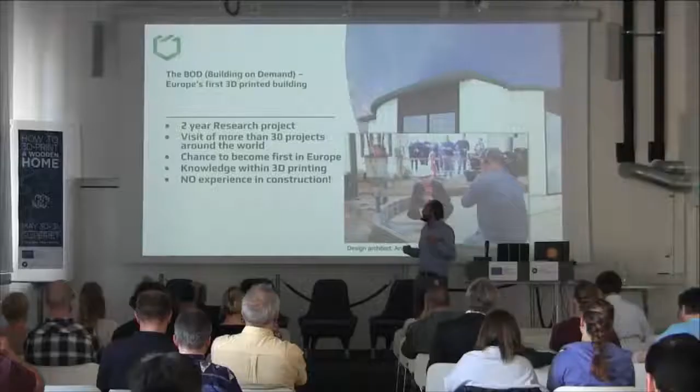So the background of the project: as I told before, we had the 2-year research project that was made along with NCC and 2 other Danish companies. That is the way we went into this field. Then, after a conference we had last year in February in Denmark, we realized that actually no one had built a house in Europe at that point which lived up to European standards.

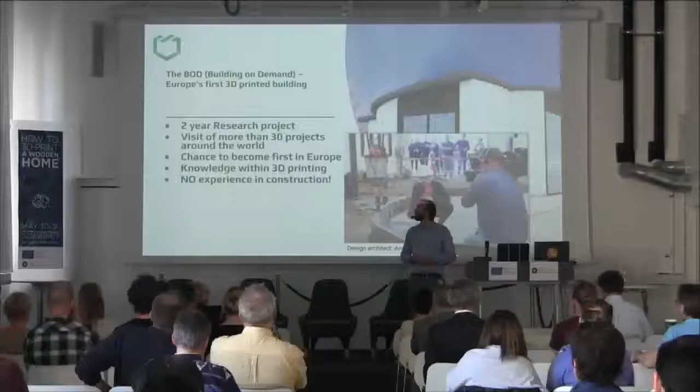So, as a startup company we just thought, let's do it. We had no background in construction and no idea how to build a house, but we thought we could do it. So that was the starting point. That was in March last year.

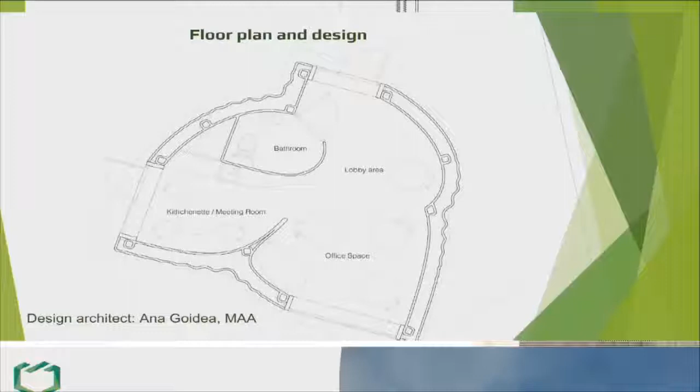And we soon found an architect, Ana Goidea. She actually was here last year and talked about the design phase of the project. She was quite newly graduated from CITA Institute in Copenhagen. She knew a lot about 3D printing, and she was obviously an architect, so we thought that was a good match. And she created this beauty. I think she told a lot about the design process. I'm not very much into that part, but I've been within the construction of it.

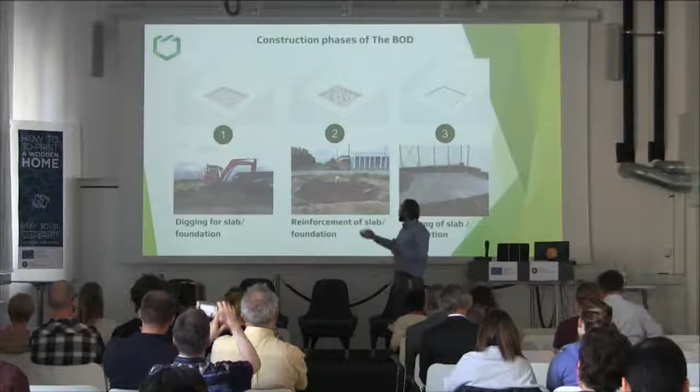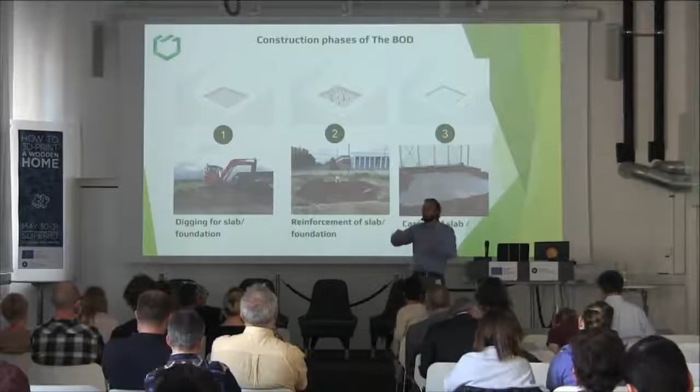So how do we 3D print a house? As I said before, when we 3D print a house, we're actually only talking about a sub part of the house, so the raw walls of the house are what we actually 3D print. So the building process, if you look at the first 3 steps, is completely regular. You'll see some excavating, digging for the slab foundation, some reinforcement, some casting of concrete. Actually, we had a very bad soil in the area, so we had to do piling as well for the house. So all of these parts were done without a 3D printer.

Then we have the erection of the printer on site. So on this plate foundation we built the printer and printed the top foundation. And the reason we had to print on the top of the foundation, this shell you'll see here that's 3D printed, is because this was the first time we met the interface of the normal industry. So we had a very tough time communicating, because obviously the top of the foundation should match

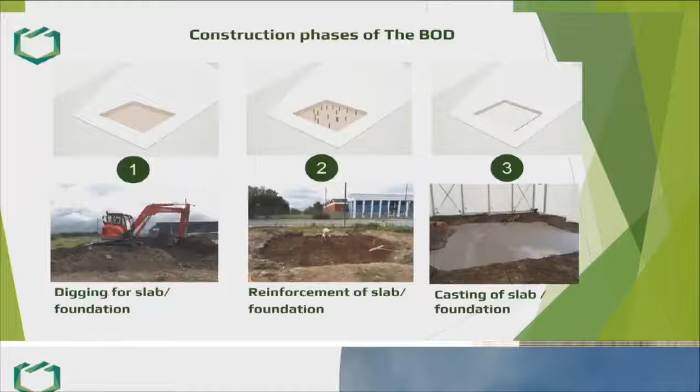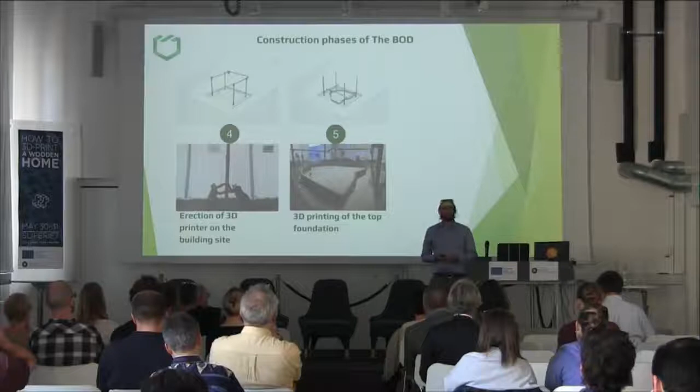the shape of the house. But we had a very difficult time communicating this shape to the normal concrete people, because we said we want this house, so we need the top of the foundation to look like this. And then they're like, we don't know how to do that. And so there we hit the first problem. So we ended up printing this part. It wasn't supposed to be like that, and then afterwards they filled up the printed shell you can see here with insulation. So this is polystyrene insulation.

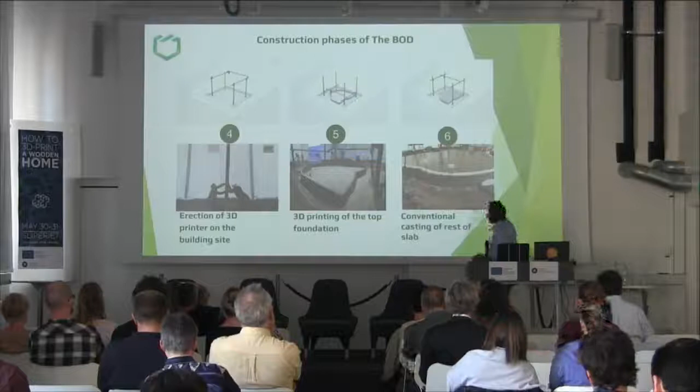They filled it up. You can see these here are the pillars for the columns later to be cast out. You'll see electricity, plumbing, etc. Everything is put into here. So again, we printed this part, and then the conventional industry people came back and filled it out with the normal things. After that was done, we created the house.

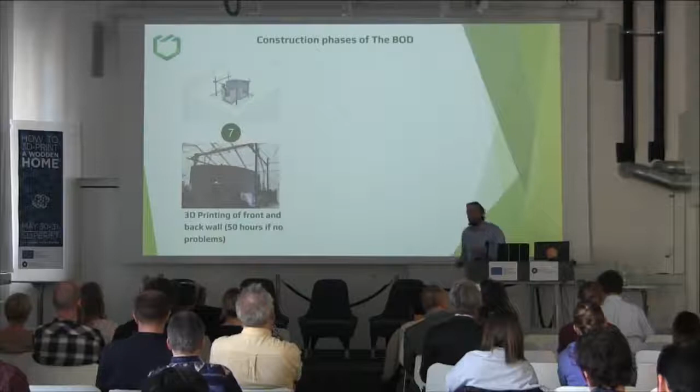So that means we printed the outer and the inner wall with the printer. And as I write here, it's 50 hours, 55 hours of printing time. But they were spread over a month and a half, because we had quite a few issues. I'll come back to those later.

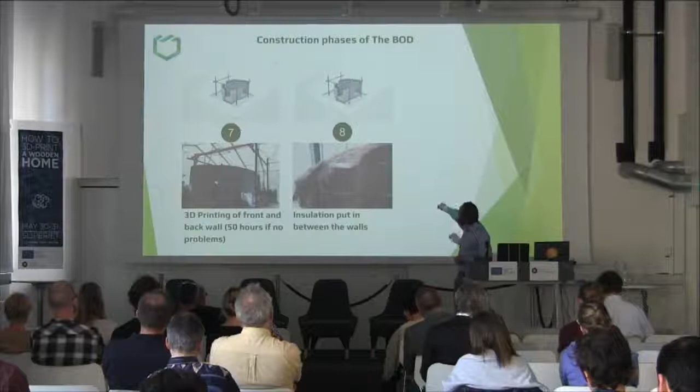Afterwards, we filled out... you can see here the inner wall, the outer wall here. This is a column. So we cast out the columns here with concrete and reinforced steel. Then we filled out the space here with insulation. This is paper granulate insulation. Then the roof is made as a wooden construction here, and windows and doors are inserted.

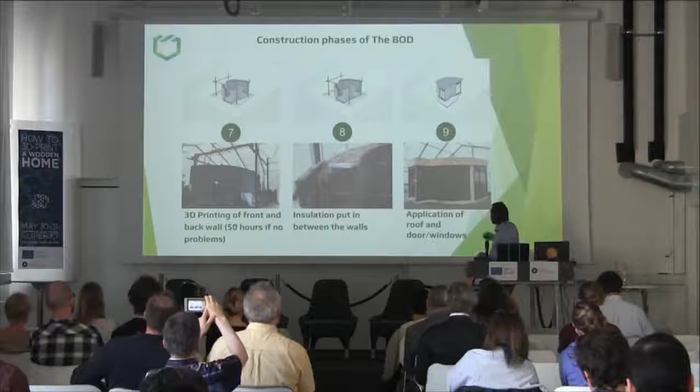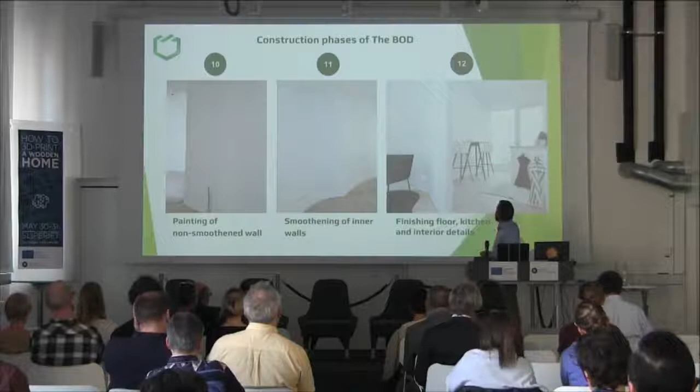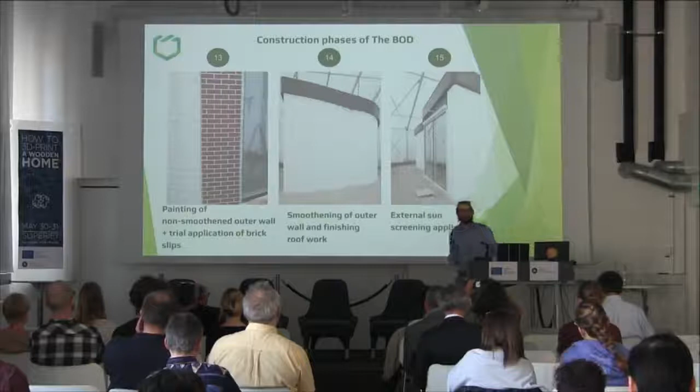And we have painted the walls, put in flooring, smoothed the walls and so on in some of the places, and put in furniture, etc. And from the outside you can see the coating, painting, like everything is finished. And at some points we have added a trial application of bricks because it's an experimental project, so we want to just have a go.

Can we put brick on top? It's these thin shell bricks, stuff like that, because we want to be able to see what is actually a viable way of 3D printing houses. What makes sense also from a business perspective, because obviously we are a business, so we also need to make money and we need to survive into the future.

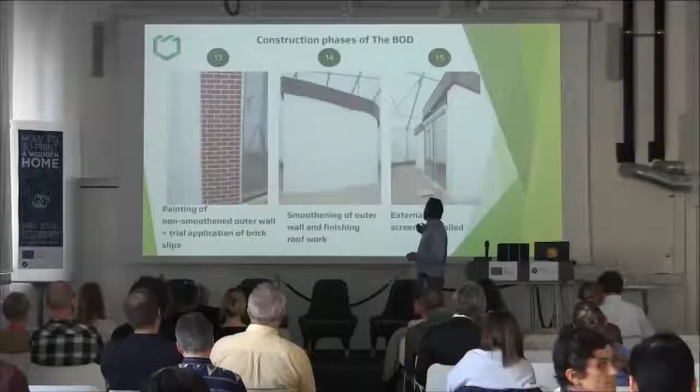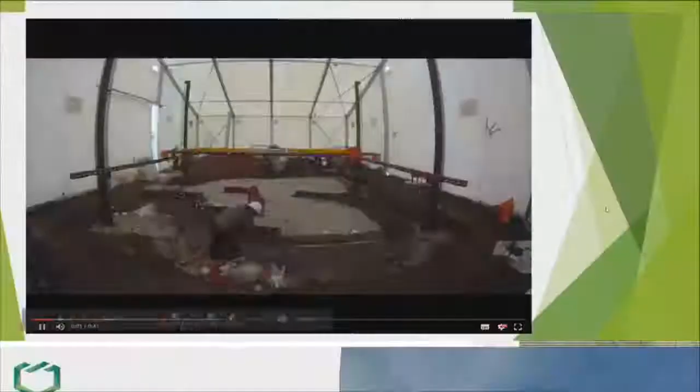So yeah, and hopefully this will begin soon. Maybe. The video. Maybe I have to push. Here we go. So here you can actually see the process going on. So maybe I'll just pause it. Maybe I won't. Oh, shit. Here. All right.

So if we look at this image here, as you can see, we print layer by layer, roughly 20 millimeter layers of concrete, 50 millimeters wide, both the inner and outer wall. And as you can see here, we have all the columns. So what we print is actually just a hollow space for the columns to later be cast out. In the bottom, we had reinforcement steel going all the way down to the foundation. And after we are done, we put in further steel up to the top and cast out.

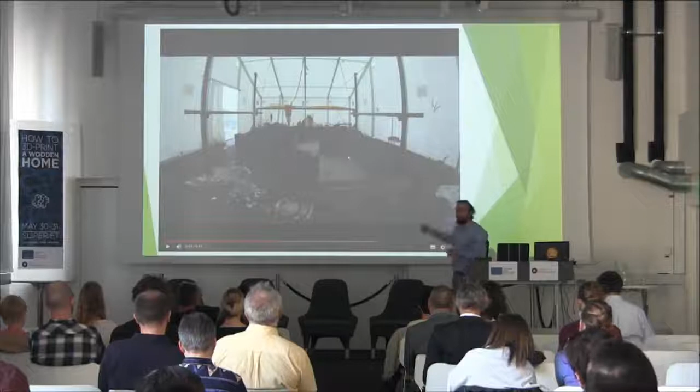You can see in the back here, that's actually me, mixing materials batch by batch. I'll be back on that later, but everything apart from the printing was very manual. And as I said, we are completely new to construction, so there's a lot of these things that we had never done before. So we just did what we thought was the most efficient way to do it.

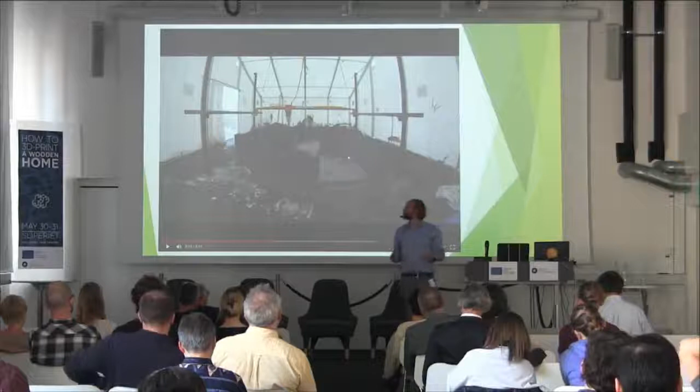It probably wasn't. But in the back here, you'll see a lot of material, and you'll see a guy over here who's actually sieving all that material, because during the process, when we were like 2 meters up into the house, there was this. You can actually see some of the traces of the explosion here. This hose here exploded because we had some large rocks in the mixture. We ordered the mixture to be a maximum of 8 millimeter stones. We knew we could handle that with all our gear and pumps and so on.

But by some error, I don't really know where it happened, we had these 20, 30 millimeter stones. So they came into the pumps and into the hoses and clogged the whole thing, and stuff exploded. But obviously that explosion delayed the project by 3 weeks, because then we had to go back, fix everything, get a new pump, get a new extruder, get a new hose.

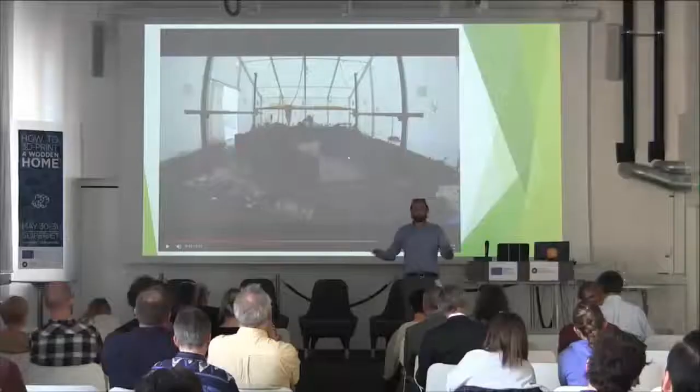Then we had to find some mechanism which could sieve all that material, because we had like 15 tons of material here. We couldn't get it out of the tent because we didn't have the room to put in a truck. So we had to sieve it in place and hire a guy to just sieve material from morning to evening for the rest of the project. So yeah, that was one of the learning points here.

Over here, we have Michael, my colleague, it's a bit hard to see, he has two computers. One is controlling the machine. The other one is connected to some cameras mounted on top of the extruder here. So at every point of the process he can actually see what is going on directly where we are printing, and then adjust accordingly. Because it was the first time we did this, and because we mixed it manually, there were small variations in material all the time.

So it meant that, for instance, the wall would be a bit more rough in one place, or suddenly there was high moisture in the environment, and the concrete became a bit softer, and it flowed faster out of the nozzle. So we got these hanging things, and he needed to adjust for that right away in the machine.

So for this process, he was there all the time, pushing 2 buttons, like extrude a little bit more, a little bit less, a little bit more, a little bit less, for the entire day. So as you can see here, 3 people working full time to have a machine 3D printing a house.

Not very efficient, and that's also going back to the point from before that we are not really world champions in this industry yet, and nobody is, because if you look at all the videos from all the others, you have like 10 guys around a 3D printer doing a house. And that's all right, because all these 10 guys need to learn something in order for it to be better and improve on the technology in the future. But let's see if we can continue this.

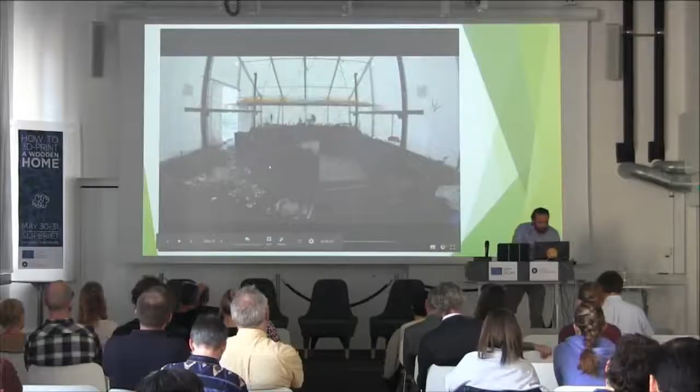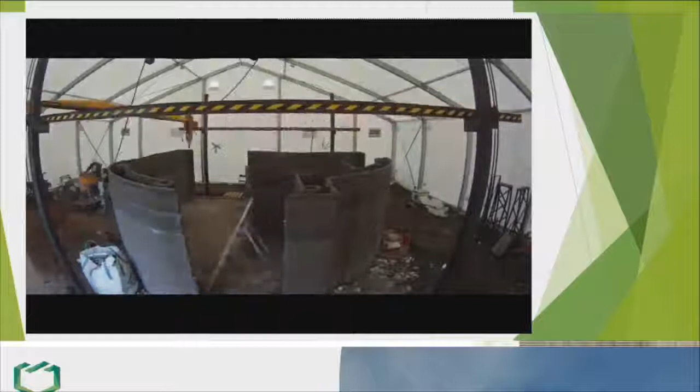All right. Yeah, so we continued. You can see it's night and day, night and day, night and day, and at some point the camera can't really see, so we shift the angle. Actually, here you can see a little bit better over there. The mixing station, the pump goes through, and here. Scaffold going around, because we had to put in wall ties all around in order for the walls not to topple over. And actually, if we go a little bit back here, it's actually good to see.

You can see here, these splits here, roughly, are what we could print in one day. So this is roughly 50 centimeters on a good day. That's 50 centimeters of the entire house, but that's 50 centimeters in roughly 8 hours of printing. So you can see there's some hours in this project. Obviously, the machine will be faster, and we can do it faster in the future. But this is the reality right now. This is how we did it.

No. Can we move beyond this?

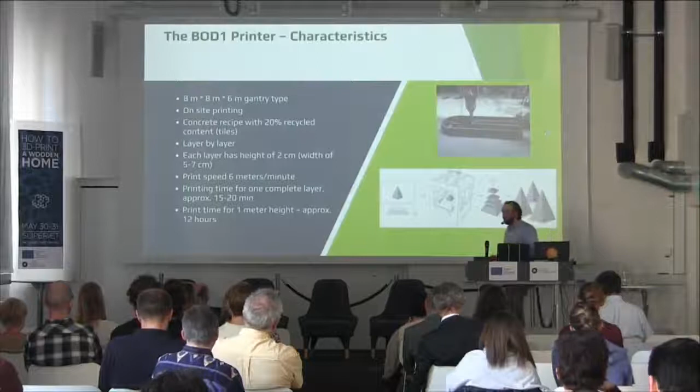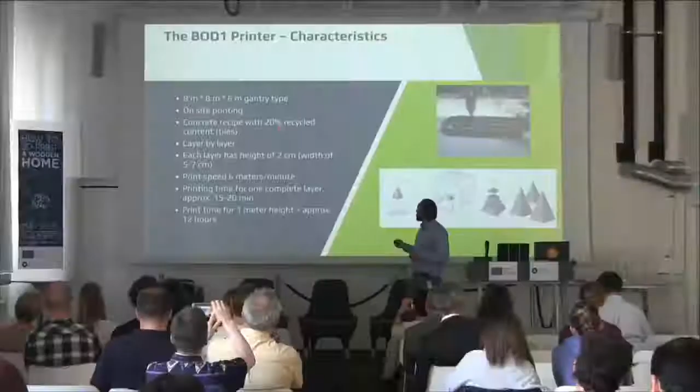Yeah. All right. A little bit about the machine itself. It's a gantry printer, so as you can see, 4 legs, very simple. 8 by 8 by 6 meters on site. We had 20% of recycled materials in the mixture, tiles that were crushed down. It was actually because the initial project was funded by a Danish grøn omstillingsfond. I don't know what it's called in English, but it's like a green sustainable fund, so we were very focused on what we could do with recycled materials in this mixture.

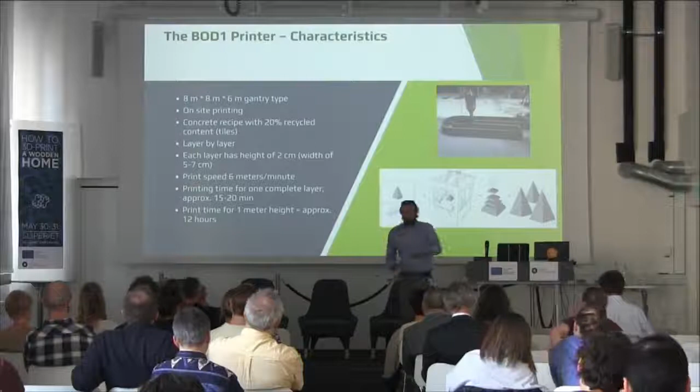That added a lot of issues, but it was a good experience, layer by layer. Roughly printing 6 meters per minute in the vertical direction. We believe soon we can print like 18 meters per minute, and then 50 meters per minute, and so on. So that will increase really fast. So we had a layer time of roughly 15 to 20 minutes, depending on the moisture in the air and the temperature and so on.

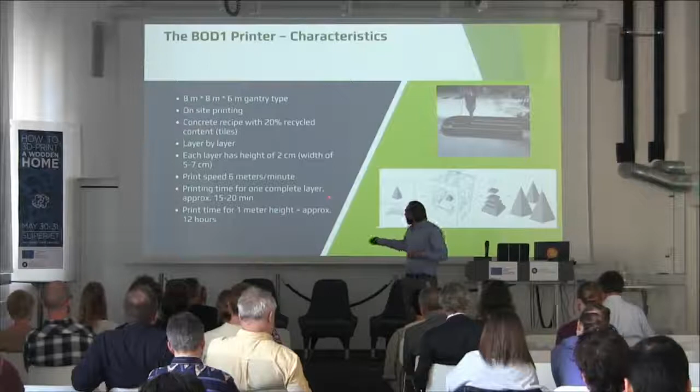So this time here actually becomes very important later for development, because when you look at the building and the material, you need to design your material for the time. Imagine that you have wet concrete, and then, 15 minutes hopefully after that, you put on another layer of wet concrete. Then that layer needs to be hard enough to hold its shape and its height, but wet and soft enough to fuse completely together with the next layer added on top. So you have a small sweet spot of a window, and that depends on material, environment, printing speed, geometry, how your printer moves, vibration, a lot of things.

So this exact material recipe was perfect for this exact house with this exact printer. It's not sure you can take it and build anything else with this exact recipe, but it was really good for this project. Yeah, so 1 meter is roughly 12 hours if you print continuously without errors.

Yeah, so what did we learn from this? A lot, obviously, and there's a lot to learn still. We know that we haven't really scratched the surface of what we can do, and we really want to improve. That's also what I said in the beginning, that we really want to be open. Right now, I can tell you everything, every minor error we had, every software error, every hardware error, and where it happened and why it happened, or why we think it happened if we haven't tested it thoroughly yet. Because we want to learn. We think this technology is still very, very new. We want to get feedback.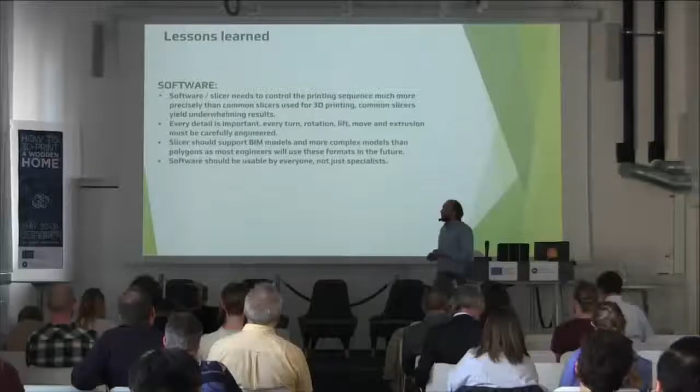But also, if we look to the future, we know that BIM software, or BIM-like software, Rhino or something like that, will create most of the houses. So we need to be able to interpret that in a smarter way than we are doing now. So instead of polygon models that you usually use for 3D printing, we are using BIM input, so we can take a Revit input and put it directly into the printer and interpret it that way. Right now it's worse, but we believe in the future we need to do that in order to move into the industry.

And obviously, software needs to be easy and usable for everyone. Right now, it's a lot of lines of code that only Michael can use. So at some point, we will need to make interfaces for other people to use.

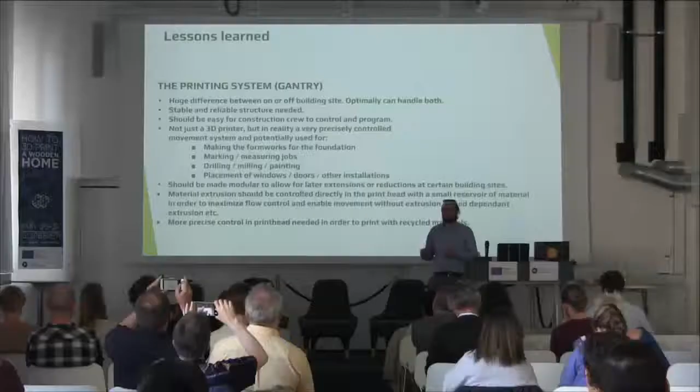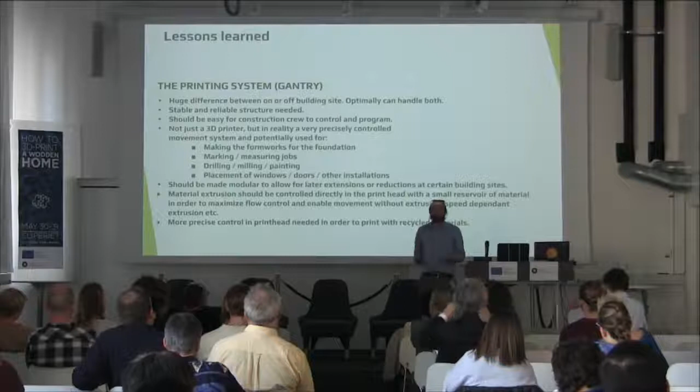Printing system. There's really a lot of difference between on-site and off-site printing. As I mentioned before, the environment, the temperature: if it rained the day before, we had all the material placed on the ground, so a lot of moisture would draw up into the material. So if it was raining the day before and we printed, we would need to adjust the mixture day by day. So we might add 200 milliliters less water to the batch, because otherwise it wouldn't work at all. So we are really vulnerable to the environment.

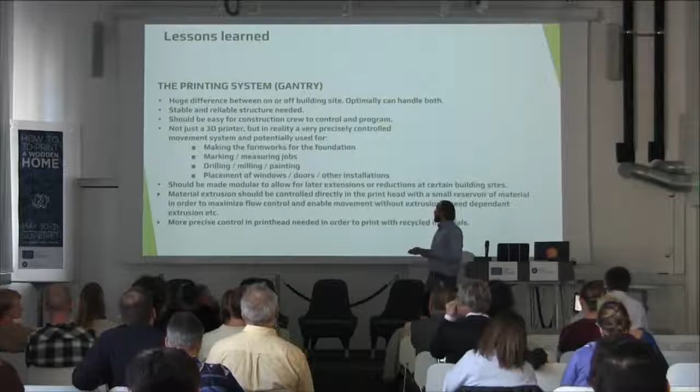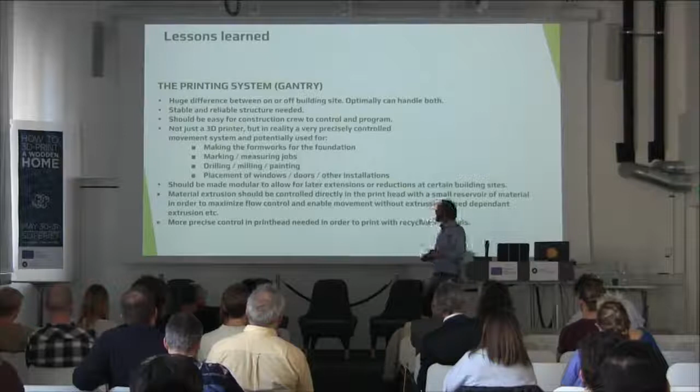We really needed a stable structure, because as soon as it moves or vibrates, we could actually topple down walls. But what we figured out was a little bit by mistake, because at some point Michael sent the wrong code to the printer, so instead of moving up, it moved down. Unfortunately, it moved down into what we'd already printed the day before, which resulted in a 10-ton press on one point of the wall. Fortunately, nothing happened, but a nozzle broke; we printed a new one, so it wasn't a problem.

But then we figured out that we can actually use that in the future. We can take this and just install a measurement system.

So after we have printed and let it dry, we could actually go down and, for every 20 centimeters of the wall, check the strength of the wall after we've printed it. So a lot of those thoughts came because of weird errors that happened during the print.

Then we started thinking about what else we can actually put on here, and instead of thinking of the machine as a 3D printer, we started seeing it as just a positioning system, a very precise positioning system that you have on the building site. And then you can start adding: a printhead is one function, then you can have a painting gun, or you can have insulation, and you can just slowly start adding features to this movement system that you have.

And then we went back and said, okay, the movement system could actually be anything as well. It could be a robot arm, a gantry, a crane, or a small robot. It has very many variations. So like this gantry printer you see, it might not look like that in 2, 3 or 4 years, but it's just how it looks now because of coincidence, because that's the printer we know and know how to control right now.

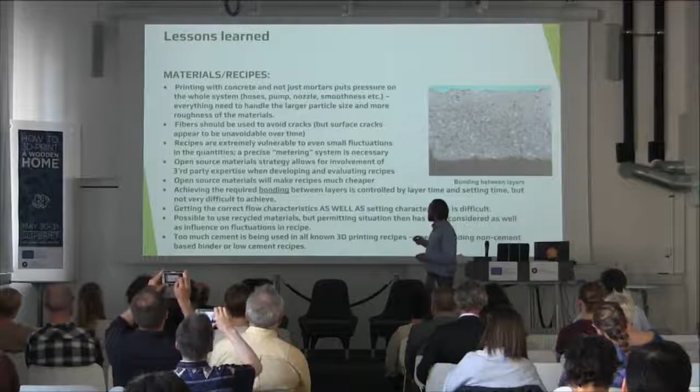It should also be modular, because obviously not all houses are the same. Most houses are different and in different conditions. And we need a lot more precise control of everything that happens, in the material and so on. If you look at the material specifically, if some of you want to experiment, I think it's on our website somewhere, or I can give it to you. It is based on cement, sand, gravel, crushed tiles, polypropylene fibers, and a bit of plasticizer to make it more fluid through the pump system.

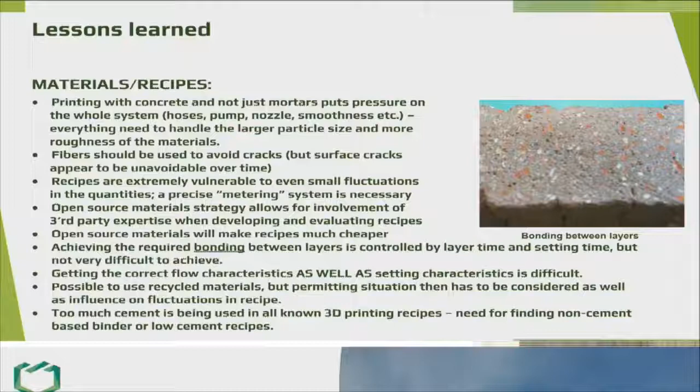But the difference between what we did and what we see around is that we actually put in gravel and large grains, because most recipes we see around are just really fine mortars. But if you look both at the price and at the strength performance, at some point you want stones in your concrete, because it adds a lot of strength and makes it much cheaper in the long run. Fibers are at this point necessary; I'm not sure in the future. It was the only solution we could get to avoid setting cracks.

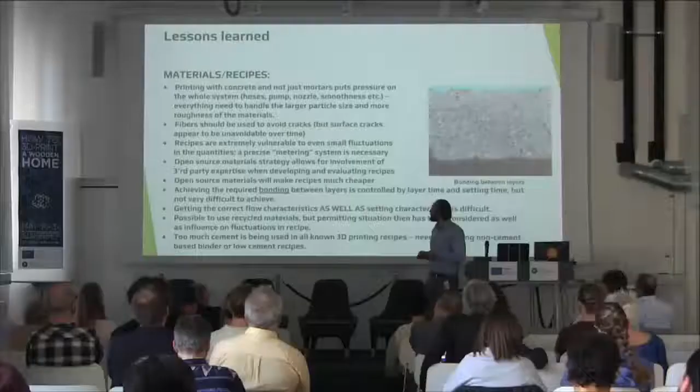And then again, recipes are really vulnerable to small fluctuations in moisture, in water, as little as 20 to 50 milliliters of difference in water. It could mean a really good print or a really bad print. So there's obviously a lot of issues there. So we think open source materials definitely are our way to go for the future, because we don't want to be material experts. We want others to contribute with their knowledge as well, because again, we are not construction people. We are technology people.

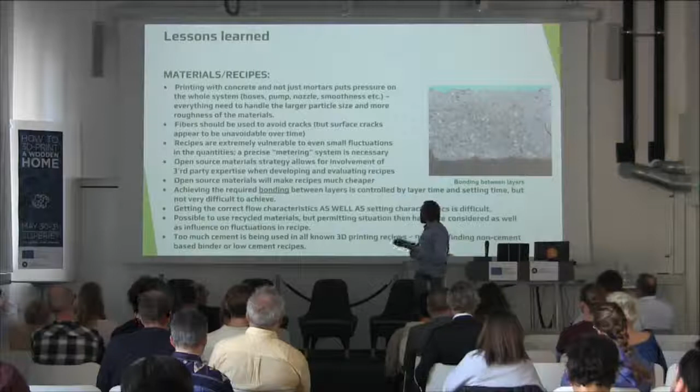It's actually quite easy to get bonding between layers, but it's controlled by layer time and setting time and so on. Flow characteristics are really difficult to get straight, especially when you're out in an environment that changes. I think it's easier inside a construction hall. And if we look at all the recipes out there, as well as our own, there's a lot of cement being used. The percentage of cement is 15–20% higher than normal concrete you cast out there.

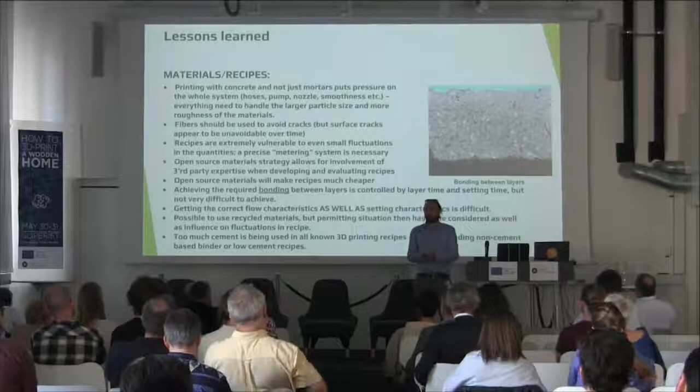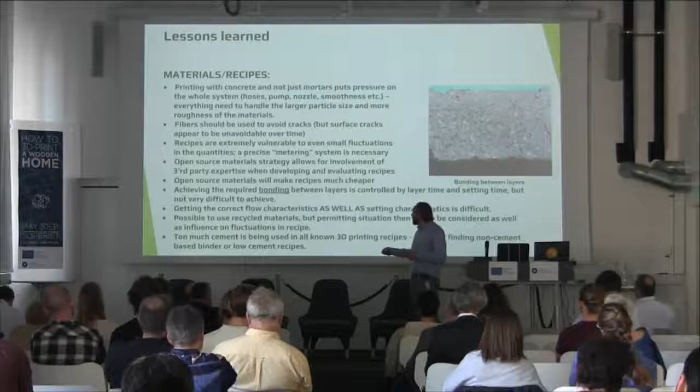Which means for the environment, even though we put in 20% recycled materials and actually used less material in weight than you normally would, the high amount of cement is making it less environmentally friendly, because cement is a big sinner in concrete. It needs a lot of heat to produce and so on. So there's definitely way too much cement in this material.

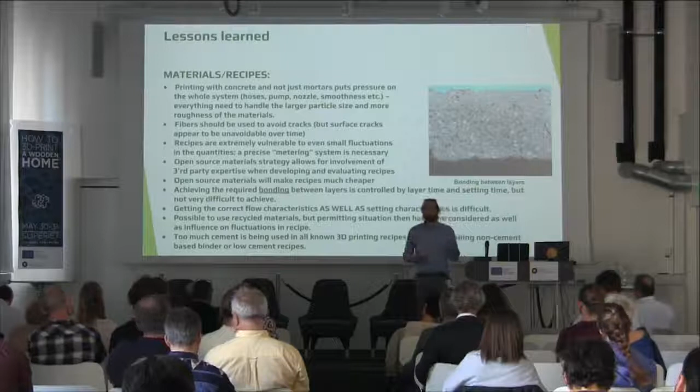So we need to find either a non-cement binder to use, which is why I think this wood project here is really exciting, or find other recipes that have a lower content of cement, where we can control the fluidity in another way. And we hope that some of the material guys out there will help us do that.

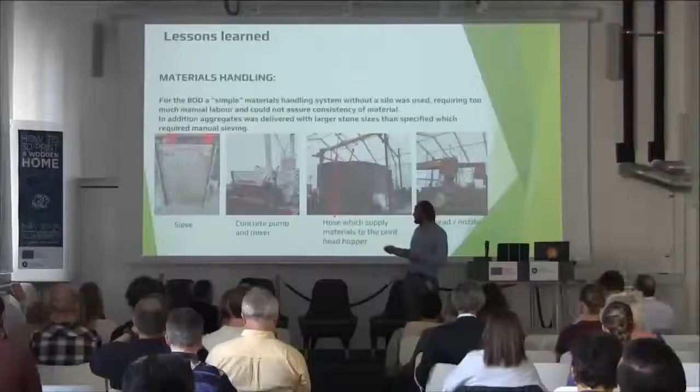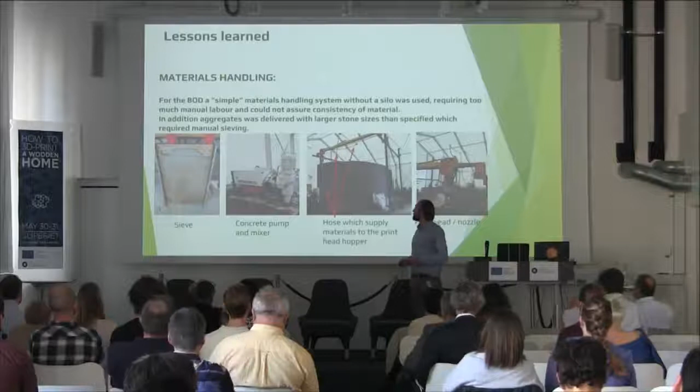And the material, oh, like this. The material handling system for this project was quite simple. As you can see, the sieve, that was the one we made to avoid all these big stones. Very basic mechanical thing, but required one man full time to do it. Obviously, we won't need it for the next project. I think we've learned how to control our material now.

Concrete pump and mixer. We actually ended up detaching this part and only using the pump and another mixer, but that's a different story. Hose to supply the material, so you can see up here, just mounted in some wheels in the roof. We have the hose where we pump the material out to the printhead, and we have the pump here, or this part of the pump here.

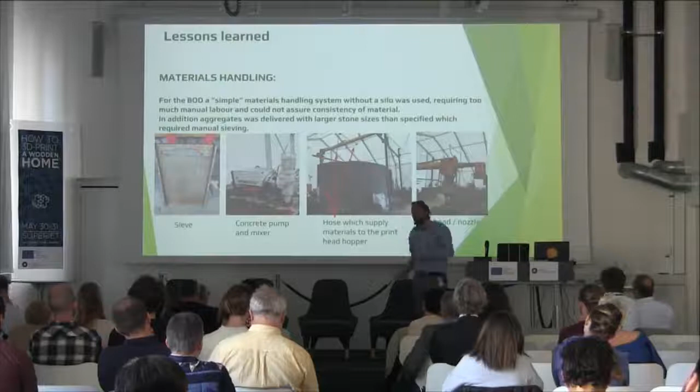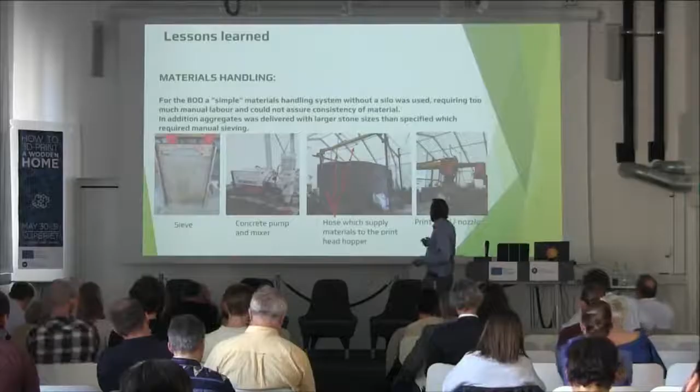This was controlled just by a switch by Michael, so he was looking at the camera that looked down into the reservoir up here. So every time he's like, okay, we need material, he turned it on. And then when it's full, he turned it off. Obviously, that should be automated as well. So all this material handling system should be automated. There's several ways to do it.

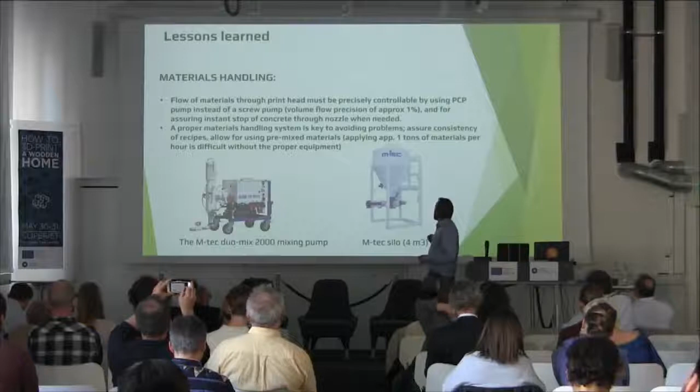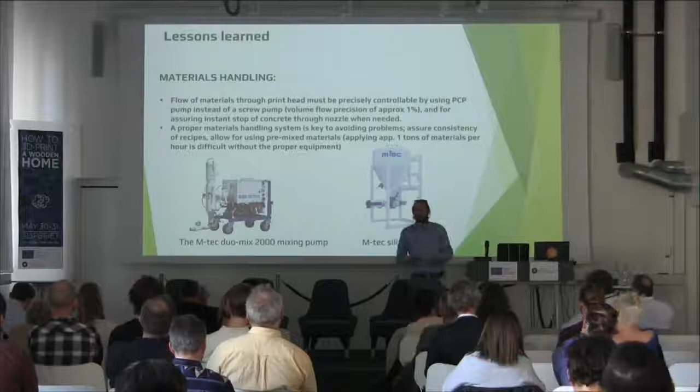If you go with dry, completely dry, pre-mixed mixtures, you can do it with silos like this, and continuous mixers. The only thing is that it's very difficult to get recycled materials into these types of mixtures, because as we'll come to, no, that will be later, sorry. None of the concretes with recycled materials is yet standardized, so you won't find a standard for recycled materials in concrete, which is a huge problem if you want to use them, obviously. Hopefully there's something in the future there.

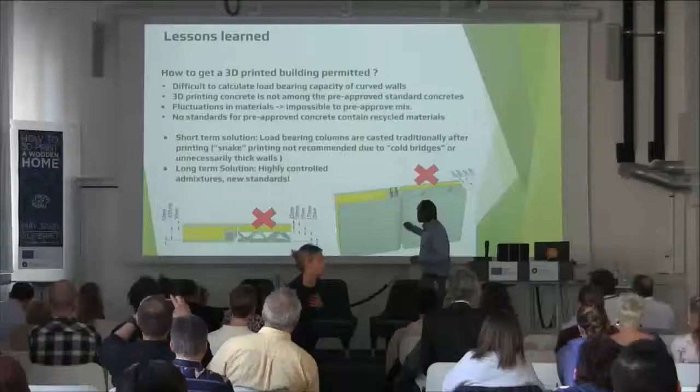And then, how did we get it permitted? Actually, it wasn't that difficult. So what you need for permission in Denmark, I don't know if it's the same in Sweden, is you need an engineering company to sign off. You need their insurance to be convinced that it's actually doable. And then you need, obviously, to have the kommune, the city council, approve. And then after it's done, they will send a representative, and they will do some measurements in terms of vibrations and so on. And if you pass all those tests, you have a permission and you can use it.

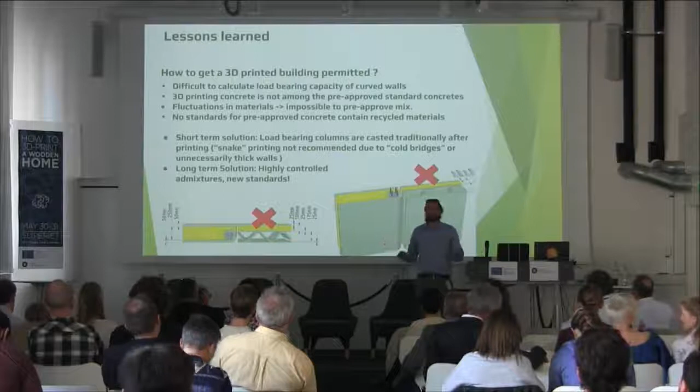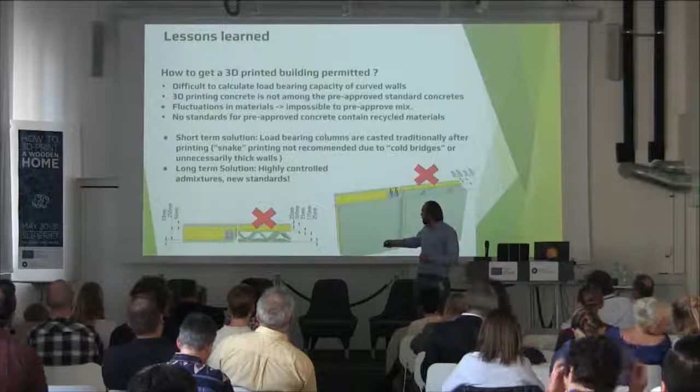We haven't done the last test, but we are quite sure we get it because we have the building, we have the site for 10 years, so we really want to rent it out to not lose a lot more money on this project. And that's obviously the short-term solution. As I mentioned before, the only way we could actually get a permission was to have a static system that was conventional. So that's why we did these columns.

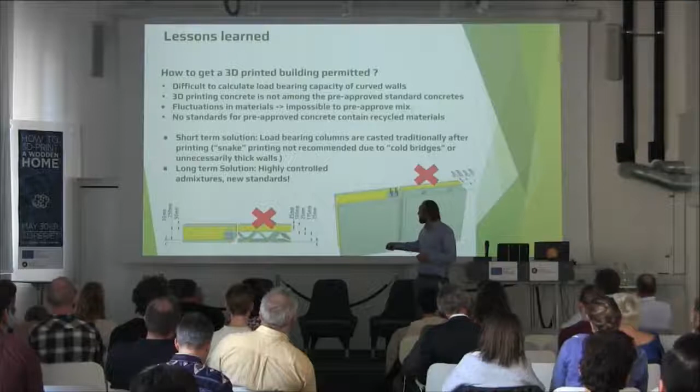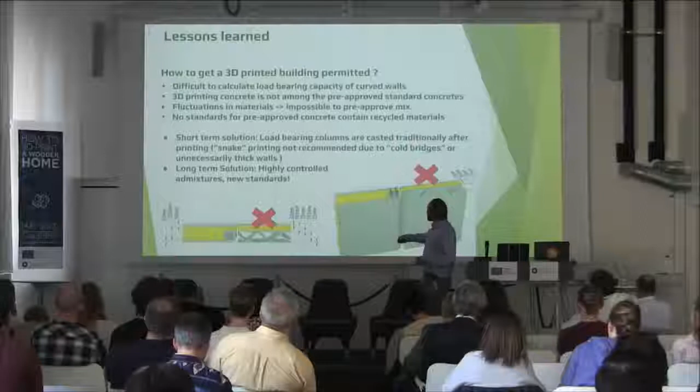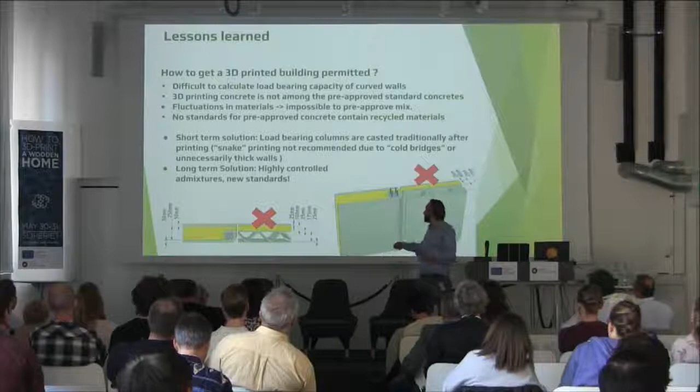You'll see a lot of this around the world. I don't know what you can call it. We called it snake printing, which could be anything. Where you make an outer and an inner wall, and then you make this pattern here. In Denmark, it's not very doable because if you don't have insulation on one side or the other, you will have a thermal bridge, which is just not allowable. You can't get a permit if you have thermal bridges. So that's why we needed the inner wall and the outer wall to be completely separate.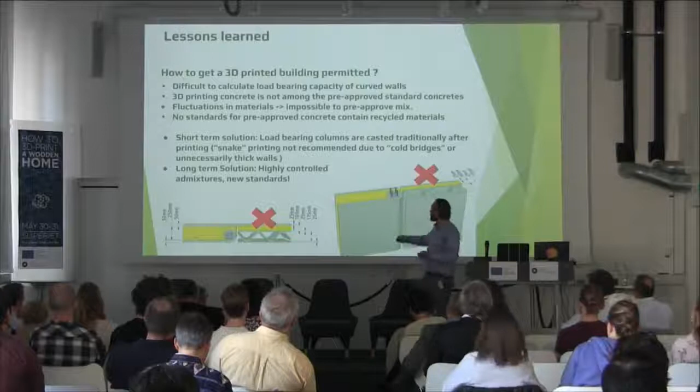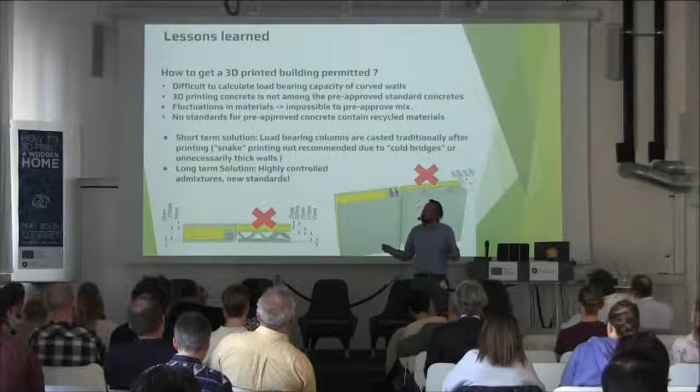You can do this, but then you will get a really broad wall, because you would need insulation. In Denmark, you need a lot of insulation, maybe 25, 30 centimeters of insulation. And then you need this, so you will have walls of this thickness if you're printing. So obviously it's not very optimal for space utilization.

Obviously in the long term, more controlled mixtures, more statistics of materials, standardized materials, and so on. But that will take years and years to accomplish. So right now, we take the quick road, because this is simply too slow, because we need the European Commission to accept new standards and so on. And for those of you who've worked in that system, it's slow, really slow. But fortunately, you can circumvent it that way.

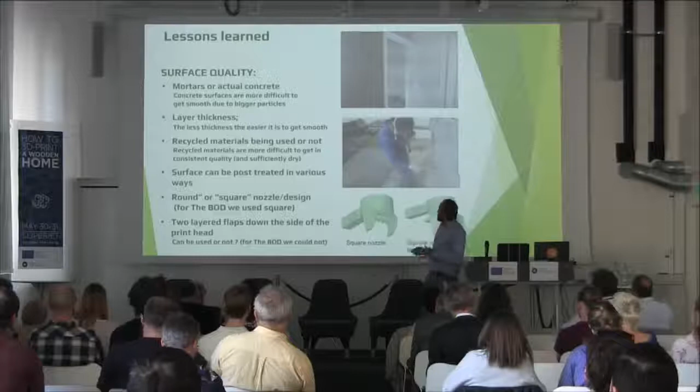And surface quality. That's a thing you'll always see around. It's a thing we're working a lot with right now. After we have printed, we have obviously been doing a lot of development since. The thing is that depending on your admixture, if you just go a bit back, you'll see most of the printing done around with concrete is where you have just a round nozzle that extrudes, and you'll have the surface as you can see here. That's what you see. A lot of architects like it. It's actually beautiful in many applications.

What we want is actually to be able to control it. So right now this is what we could do. We had short wings, as you can see here, which control the sides, so we get a square instead of a cylinder shape. But in the long term, we are experimenting right now with prolonging the wings here, so we get a completely straight, completely smooth wall. It's a bit more difficult than that, and it will take some time more. But I believe we can get there quite soon.

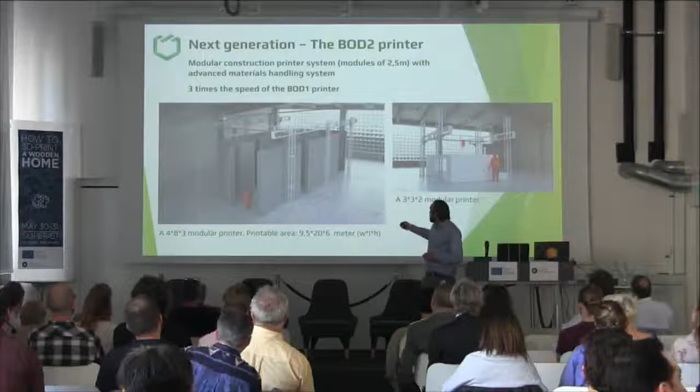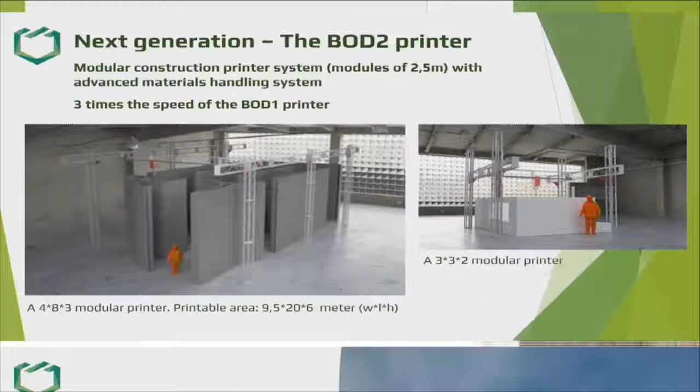So also we are thinking about modular design. This is what we believe is our next generation of printer. In this format, we are staying with exactly the same principle, just in a modular way, so we can build it the size we need for the project. And just to be clear, we want to be technology providers. We don't want to go out and print houses everywhere. We are not construction guys. We want to build those machines, teach people how to use them, and then go back to Copenhagen and develop a new machine.

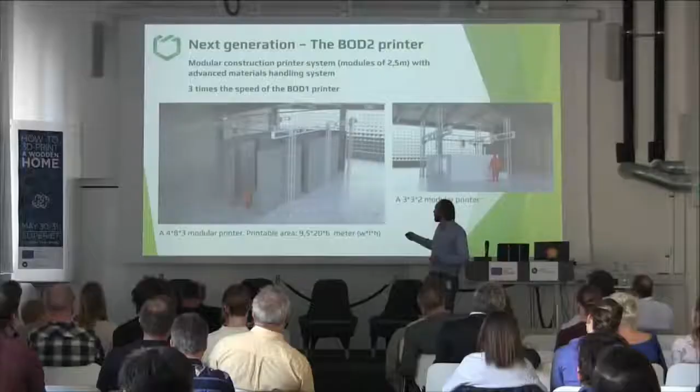But we are quite sure that in the next couple of years, maybe the next 3-4 years, we will have to go out there and do projects, because no one will adopt a technology that does this. Because it's way too risky. We actually asked NCC in the beginning of the project, NCC is Swedish, right? So you guys know it. If they wanted to be part of the project, and they said no, it's way too risky for them. So if you go to the normal construction business, they will just say no. But they were really helpful, and they did a lot of technical advisory, but they were completely out of the picture in the process.

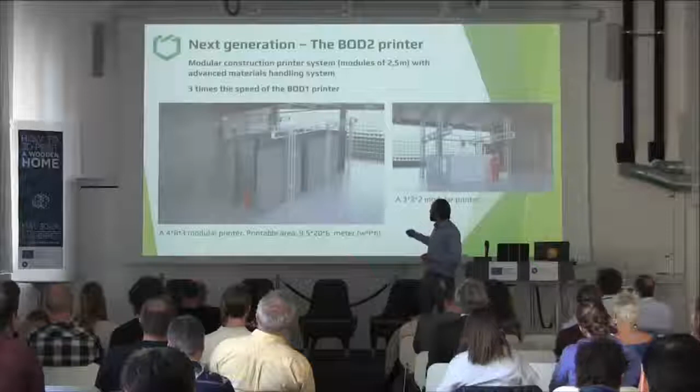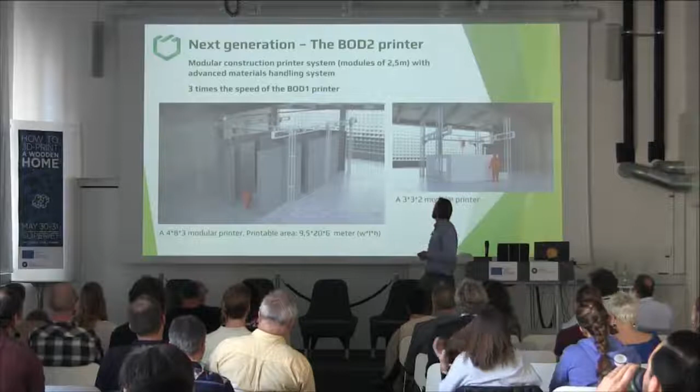So obviously the printer needs to be much better, and at some point we hope we can make them good enough so we can put them out there and people can use them to print. Obviously we hope construction companies can use them to print their own houses. You can see small and big ones and so on. And yeah, that's actually it.

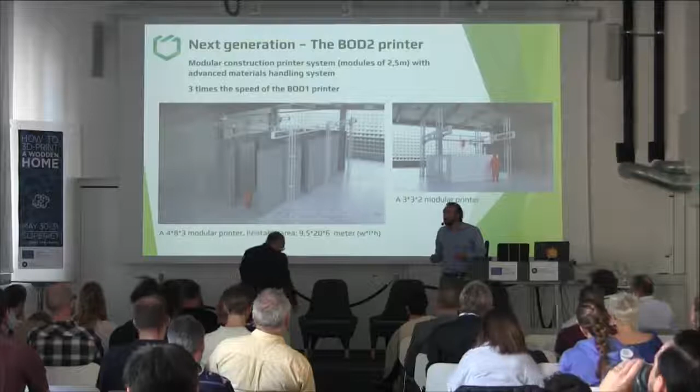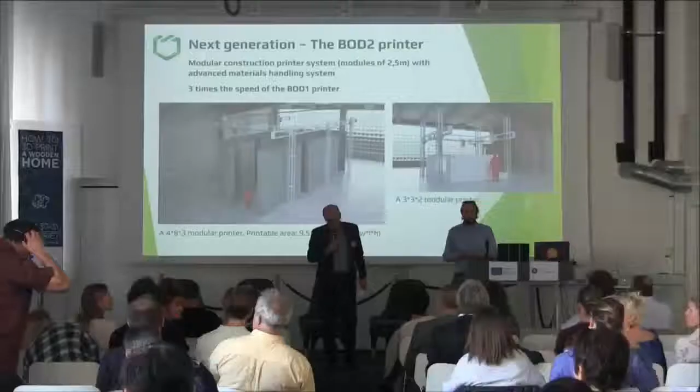I hope we have time for, how are we on time? Well, we're a bit over time, but we will have one question. David, where are you? There. You can come up. During the time we switch speakers, we have one question, and we will have more questions in the plenary discussion later. I'll just switch the screen. Thank you.

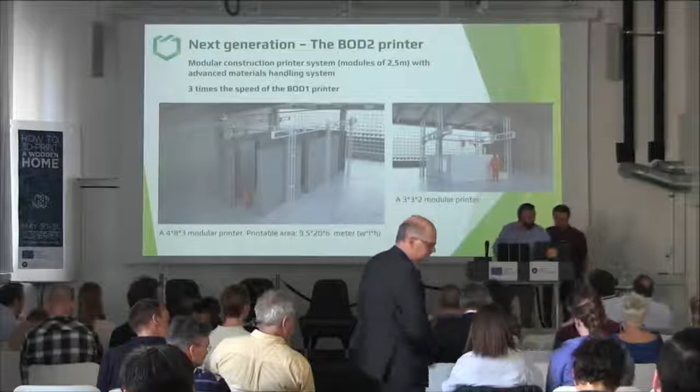So my question is about energy consumption. Does a 3D printer need a lot of energy, and is it today possible to use renewable energy, like wind energy, solar energy? The energy consumption in the printing itself is actually not that much. We didn't measure it, but it's not very much. I think the energy consumption within this is the production of the material. For instance, cement. The high CO2 footprint of cement is not from using it; it's actually from producing it.

For green energy, I think no matter what you do, you can't really know for sure that you're using green energy. You're using some energy, and some of that will be green. Obviously, you can say you buy green energy, but in real time, you never know. It just comes from the grid, so whatever energy is in the grid, you will use that. But I think that's the same for everything else.